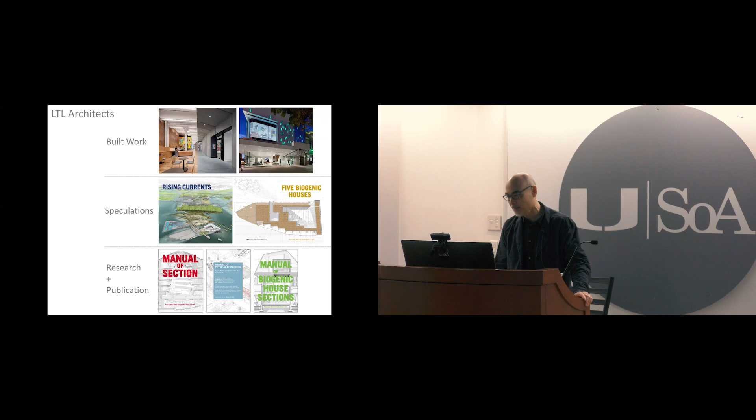The publications have taken, I would say in the last decade or so, the form of what we like to call manuals. We like this term because it references questions of utility or usefulness, and we really think of these publications as tools for the discipline, for students of architecture.

The first of these was the Manual of Section that was mentioned earlier, published in 2016. It's been translated into a number of different languages - we think 5 or 6, we're not sure. We're told there's a Turkish version, but we haven't seen it yet.

So if you see a copy when you're in Turkey, give us a ring and take a picture of it.

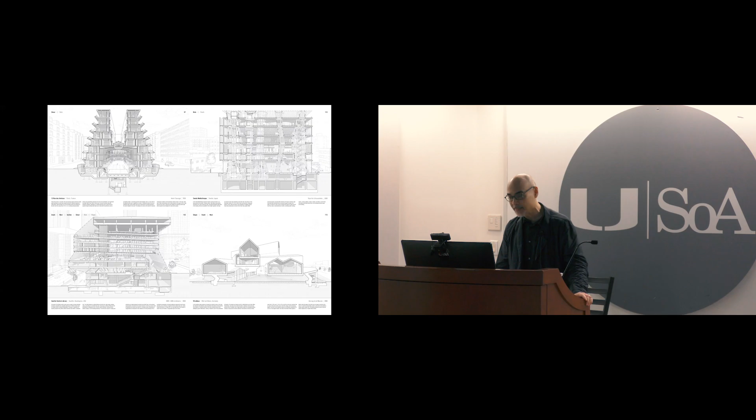The book operates through a series of 64 detailed sectional perspectives that basically investigate section as a site of invention and a space of resistance to the kind of ruthless economic logics of contemporary modes of architectural production. I'm not going to get into all of that tonight,

but I think really since that book was published, we have been, like many people, increasingly concerned about the existential urgency of climate change and its relationship to architecture, with the legacies of extractivism and the material exploitation of landscapes, and the devastating impacts of these practices on humans, on non-humans, and on the planet.

And so in 2022, we came out with this publication after about 4 or 5 years of research. In many ways, I think we think of this as the more important book. And as was alluded to, it aligns with the moment in our own practice where we're opening up these questions of how we build, and more specifically, what we build with in a moment of ecological crisis. So the book is divided into 9 material chapters and a chapter on reuse. This notion of reuse is incredibly important in relationship to addressing notions of embodied carbon.

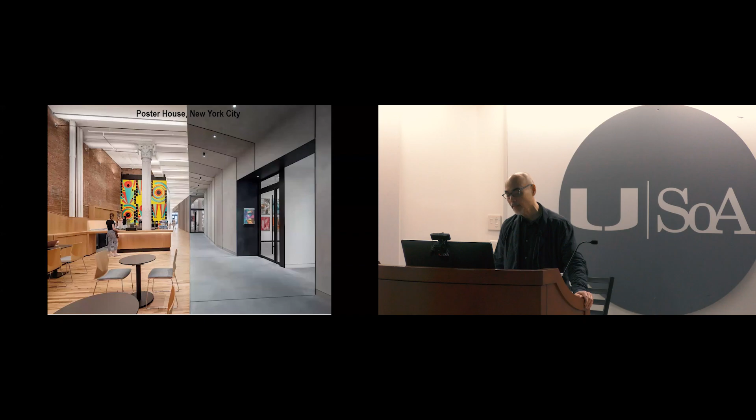And although I won't talk about them tonight, our office has been involved throughout the course of our history with projects that engage reuse at a diversity of scales, from the infrastructural scale of renovating Steeplechase Pier in Coney Island in the wake of Hurricane Sandy, to the renovation of a recently opened museum in New York that reutilizes a 19th century industrial building, to this project for an art museum in Austin, Texas, that repurposes a turn-of-the-century theater turned department store.

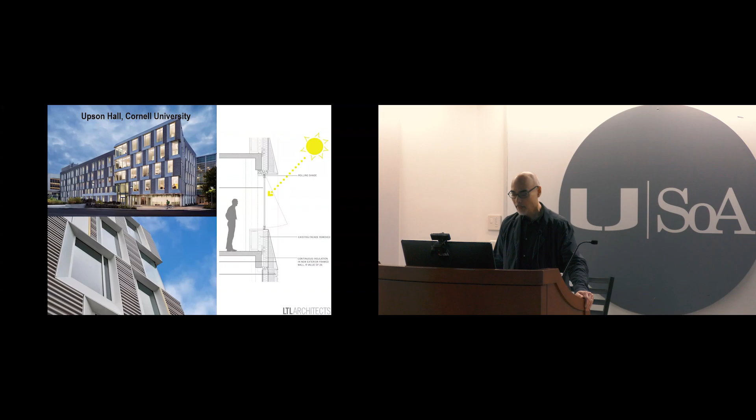Many of these projects, while capitalizing on the logics of reuse, are also dealing with questions of operational carbon, that is with the energetic and thermal performance of buildings. That's really been the primary preoccupation of architects over the course of the last couple of decades. So there's been a lot of focus on how to make our buildings work better, more efficiently, with a higher degree of operational efficiency. But what we've been really thinking about recently is this question of the role of materiality and embodied carbon, and maybe I'll just go through this very quickly.

You've probably seen graphs like this one. This is laying out the trajectory of global greenhouse gas emissions relative to annual outputs of carbon. So the black line is where we are. The big gray swaths are where we're going if we don't actually make any changes. But the frightening reality is that this is actually where we need to be.

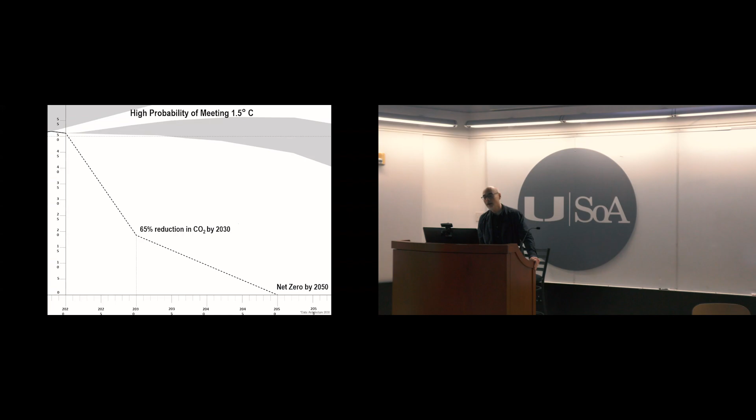Oops, sorry, too far. Which is a 65% reduction in CO2 by 2030 and net zero by 2050, if we're to actually have any chance of staying within the IPCC recommended limits of 1.5 degrees Celsius change in global temperature that would allow us to avoid the most catastrophic impacts of climate change. We're, of course, already failing to do this fairly remarkably, but we think that this is not a reason to give up, but in fact, motivation to address this even more urgently in our work.

So 11% may not seem that big of a deal, but if we actually look at new global construction over the course of the next 30 years, embodied carbon actually becomes about half of that. And if we look at the increasing performance of buildings, the fact that buildings are getting better and better at conserving energy, embodied carbon becomes more than half, about 56% of that equation. The other aspect of embodied carbon is that it's what we could call upfront carbon, meaning that it's already expended at the time that the building comes into existence, whereas operational carbon accrues over the lifespan of the building. So the returns on operational carbon take longer to get to.

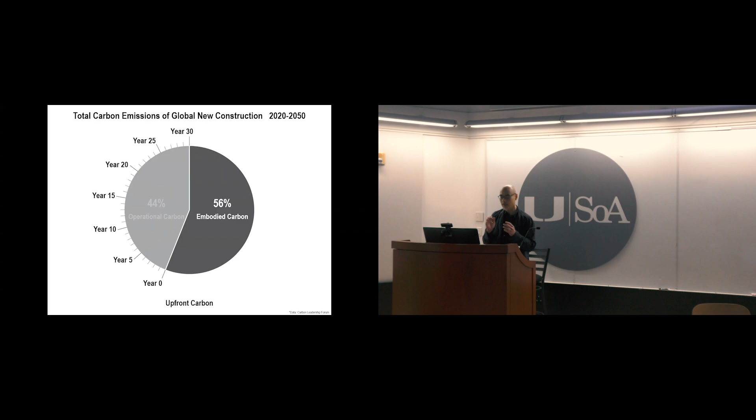And if we're really thinking about these urgent timeframes that we need to act within in order to actually address the urgency of the climate question, we really need to be thinking about, we would argue, embodied carbon. So what can we do?

Again, as we said, we can reuse, we can build less, but in fact, we're not likely to reuse our way out of this situation. So if we look at predictions over the course of the next 30 years, we're going to be adding about 2.5 trillion square feet of new buildings to the planet. So that's roughly doubling the amount of architecture on the surface of the world in the next 3 decades.

Given that enormous increase in production, which probably sounds like good news to architects, it really increases the importance of thinking about how we build at this sort of juncture, and how we think about materials not only in terms of their durability, their maintenance, their structural performance, but in terms of their embodied carbon.

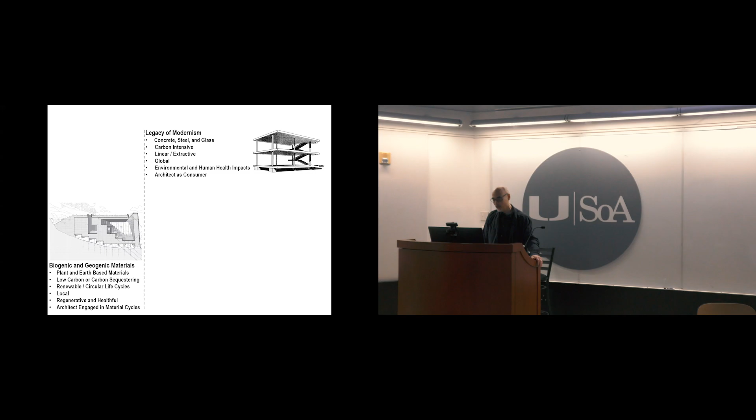But we think one of the really important ones is to build with materials that are either low carbon or, as in the case of plants, actually sequester carbon within their very cell structure. So the good news is that we have these materials. They're already here. We don't need to invent them. Well, we need to research them, but we don't need to create a new thing. They're ubiquitous, they're globally distributed, they're broadly inexpensive, and by and large, we actually already know how to build with them. Well, why is that?

Because, of course, I'm talking about these things as if they're new and revolutionary, but in fact, these are the oldest materials that we've built with throughout human history. And so it's incredibly important to draw upon indigenous knowledge, on vernacular practices, and to think about the cultural traditions associated with building with plant and earth-based materials over time.

However, as contemporary architects, we're also really interested in this question of how do we build with these materials now in the 21st century? How do we think about them in an innovative way? And what are their impacts on, in the context of the book, new forms of domesticity? So the book engages 55 houses from around the world.

And so we might start with this question of why the house? Why are we looking at houses to begin with? And this is a bit of an anxiety-provoking question for us because one could argue that single-family houses are part of the problem. We build too many of them, over 1 million a year in North America alone. Our houses are generally too big. They've gone from about 1,000 square feet in 1950 to over double that in 2020.

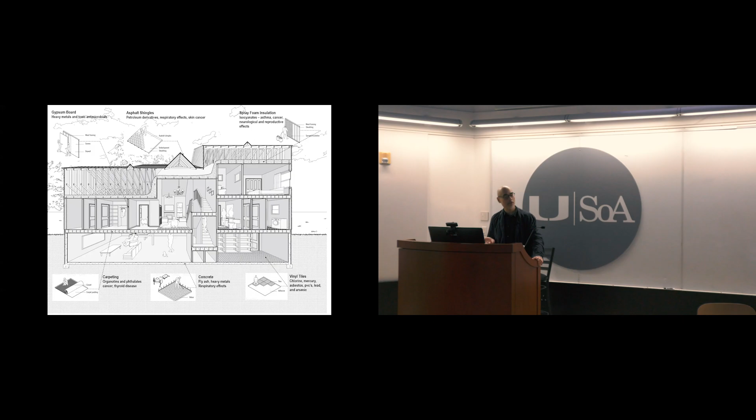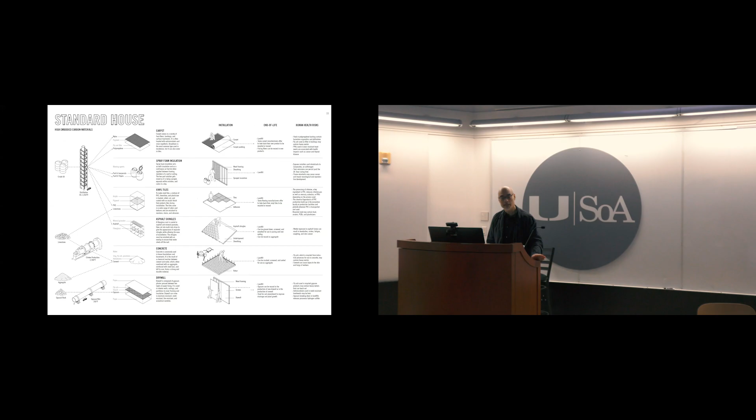And by and large, with the exception of the wood frame that's fairly ubiquitous for American single-family residential construction, they're built primarily out of petrochemically derived products that are toxic, environmentally destructive, and high in embodied carbon. These materials are essentially an extension of the petrochemical industry, a take, make, trash linear cycle, which means that at the end of the day, most of them end up in the landfill and continue to pollute and degrade our ecosystem.

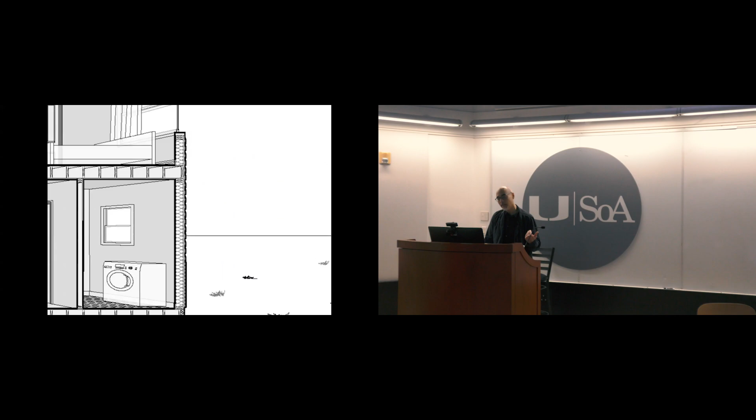If we take a closer look at the construction of the house, we can get a sense of part of the reasons that this is true, which is that if we think about how we build walls today, we tend to build walls out of lightweight, thin, single-performing hermetic layers, which are based on a strict division between inside and outside.

These materials are often working at cross purposes to one another, so inducing issues of mold, of toxicity, of contradictory building performance operations. They're also extremely hard to pull apart and reutilize at the end of life.

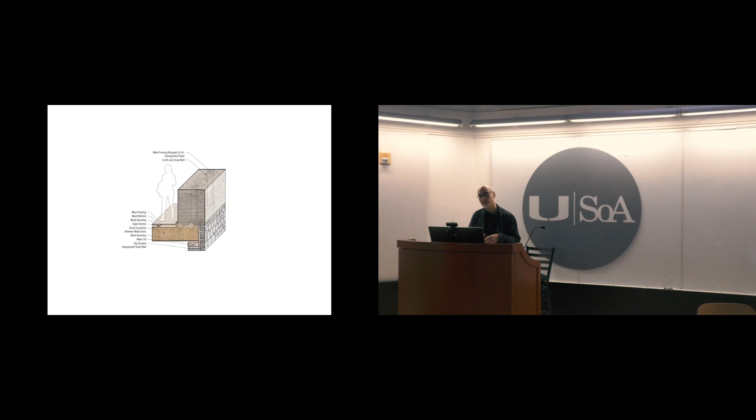By contrast, biogenic and geogenic systems tend towards thickness and towards limited material components, often integrating multiple functions in a single monolithic mass, becoming simultaneously structure and skin, insulation and envelope, a kind of symbiotic assembly in which the whole is greater than the sum of the parts.

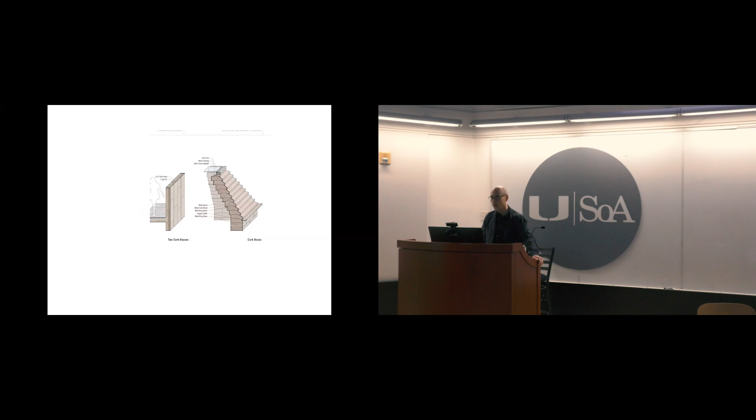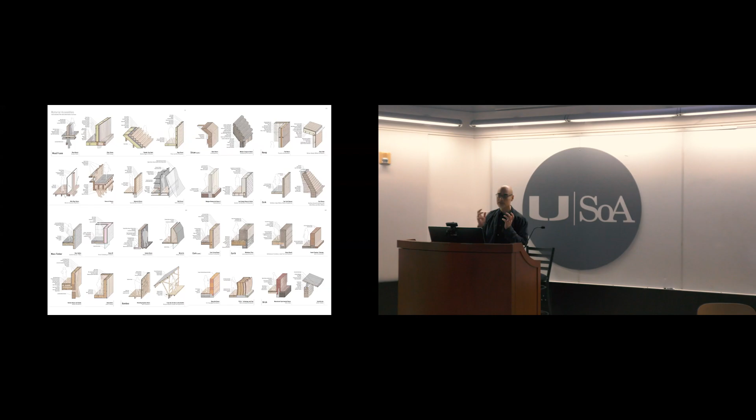So in the book, we look at, again, 55 houses from around the world. These are all, generally speaking, relatively small houses, comparatively inexpensive, drawn from different cultural, climatic, and geographic contexts. And the idea in each of these cases is to think about how in each instance, the engagement with the specifics of the material provokes an architectural response in the house, right? Provokes a kind of spatial and tectonic response in the actual design.

As I mentioned before, the book is divided into 9 material chapters. In each of these chapters, we identify the approximate carbon sequestering capacity of the material. We map each material's life cycle from field to form and back again, repositioning the building not as an isolated artifact, but as a temporary accumulation of matter and energy that has a kind of origin and afterlife, right?

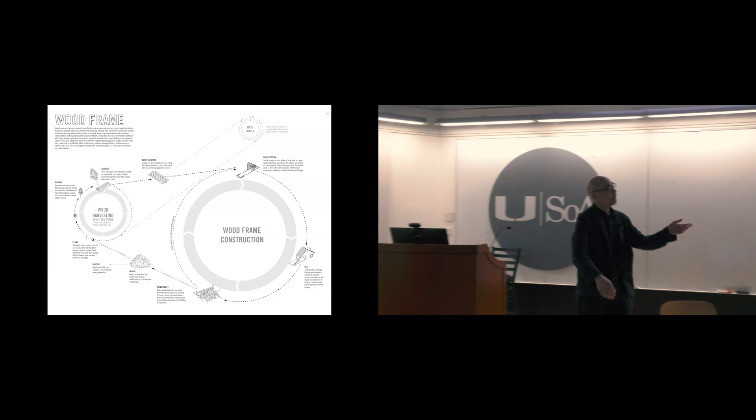So we tend as architects to only think about this 12 o'clock to 4 o'clock part of the cycle. How do we put materials together into the form of a building? But the reality is that those materials come from somewhere. They have to go somewhere after the end of life of the building, and the building really only exists for a limited point in time. So we have to think about this entire logic of how the things that we build with are linked to a whole circuit of material flows that are ultimately bound to natural systems.

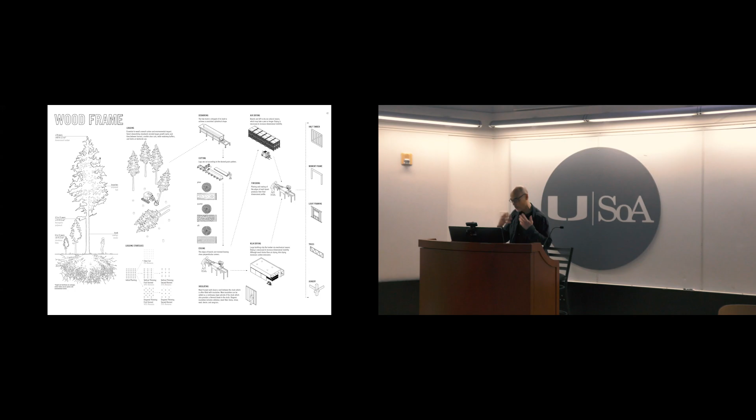We map the transformation of the material from the original plant, in these cases, to the building component. This is really important because it's the transformation of the material that actually constitutes the carbon element of the material, right? It's the industrial processing that produces the carbon of the building component.

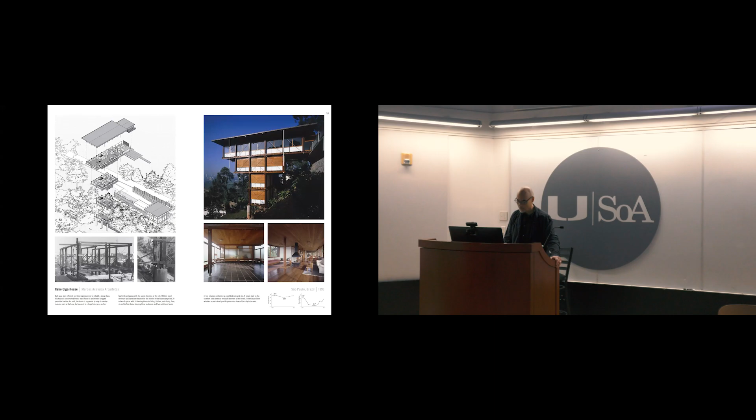Then we look in each of these houses at photographs, axonometric drawings that explode each of the dwellings, then detailed cross-sectional perspectives that allow for an understanding of the ways in which these material systems catalyze architectural response within each of the projects within the book. So I'll go through a few of these material conditions very rapidly.

I'm not going to talk a lot about mass timber because it's probably something you all have heard a fair amount about. It's kind of the poster child for biogenic materials. And obviously it has an amazing capacity to sequester carbon relative to materials like concrete and steel. However, it's complex, right? Once we start thinking about mass timber, we're talking about trees. Trees are obviously very long-lived organisms. The trees that we utilize for construction take about 30 to 100 years to mature.

Cultivating trees, logging releases carbon into the atmosphere, and only about 50% of any given tree is actually converted into usable building material. So there are issues, right? When we're thinking about timbers that have to do with the management of forests, with deforestation, with monocultures that develop in relationship to the production of mass timber. So it's a complex question. But obviously, an incredibly useful product.

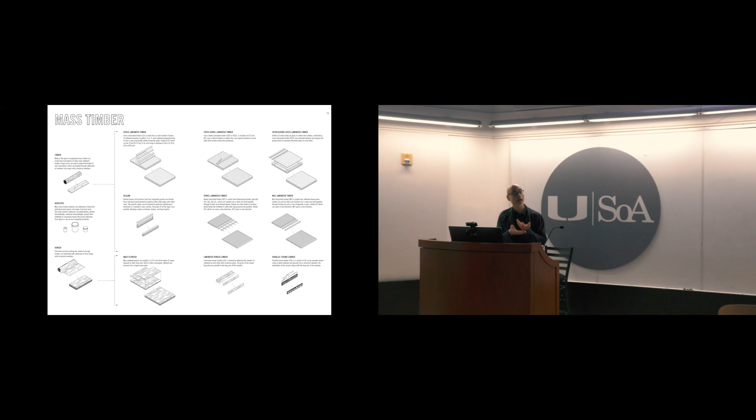I won't get into depth, but it's made from cross-laminating lumber elements in a perpendicular pattern into sequential layers so that they create these large-scale structural planks. The idea of these planks then changes the ways that we can think about building with them. So just a couple of very quick examples.

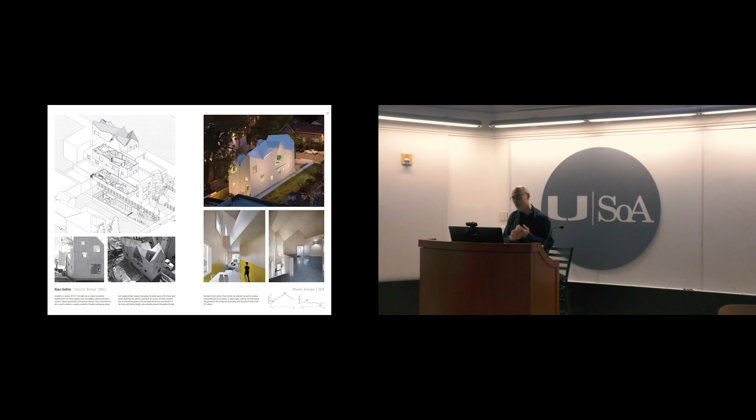Jennifer Bonner's Haus Gables, where these very large-scale CLT elements are used to create the complex internal geometry of the roofs, creating a sort of internal topography and allowing for rapid assembly on site due to the CNC milling and prefabrication of the panels.

A project by Atelier Sotamaa called the Meteorite House, that actually is comprised of 2 layers of CLT construction, a series of CLT rectilinear boxes that constitute the living spaces of the house, arrayed within a more geomorphic outer shell. That thick zone in between is really an air gap that allows for the thermal insulation of the house.

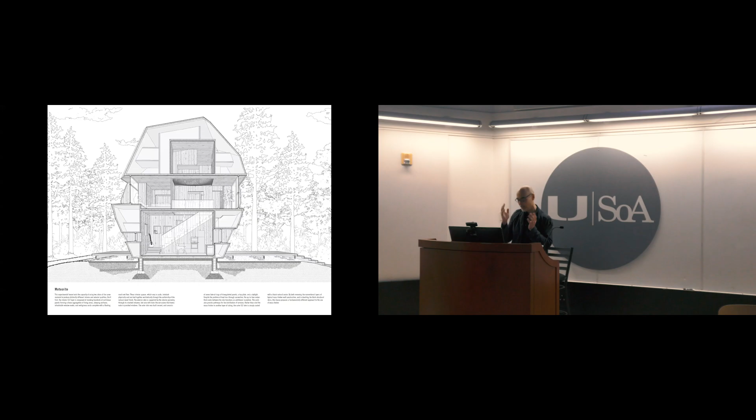So this is a house that's literally all CLT. There's no other insulation except for the air on the exterior, and the outer layers of CLT are coated with an exterior varnish for weatherproofing.

So I'm going to go through these quickly, I said. So we're still in the realm of trees, but cork is a really fascinating material. It's of course the bark of the cork oak tree. And cork has kind of astonishing material qualities. It's water resistant, fungally resistant, rot resistant. It has thermal properties, acoustical properties, and even structural properties.

The limitations when we talk about cork are really that it only grows natively in a very specific region of the world, the Iberian Peninsula and other places around the Mediterranean. And its processing is dependent upon centuries-old skilled labor practices, where the bark is carefully culled from the tree roughly every 7 to 14 years over the lifespan of these trees, which are very long-lived, over 200 years in some cases. These methods have developed over long periods of time so that the underlying organism is not hurt. So it's essentially kind of like shearing sheep.

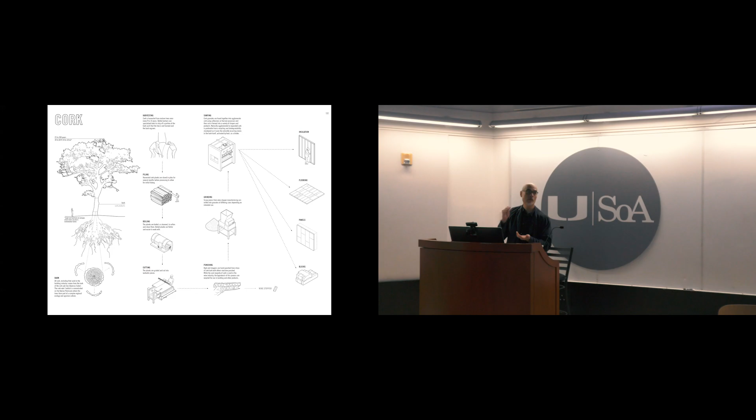The tree continues to live, and the cork goes primarily, believe it or not, almost entirely into the production of wine corks. Billions of wine corks are produced every year, and almost all of the cork that we use in the construction industry and architecture is actually made from the reground residue of the wine cork production itself. So those are granulated, ground up, and then recomposited either using additives or preferably through autoclaving, which activates the naturally occurring resins within the cork to bind to itself.

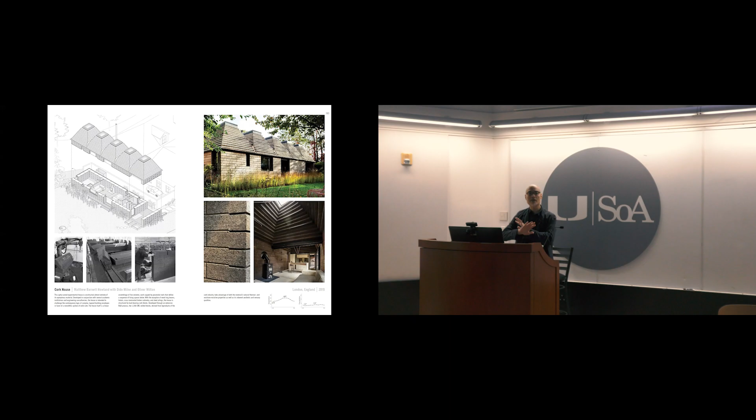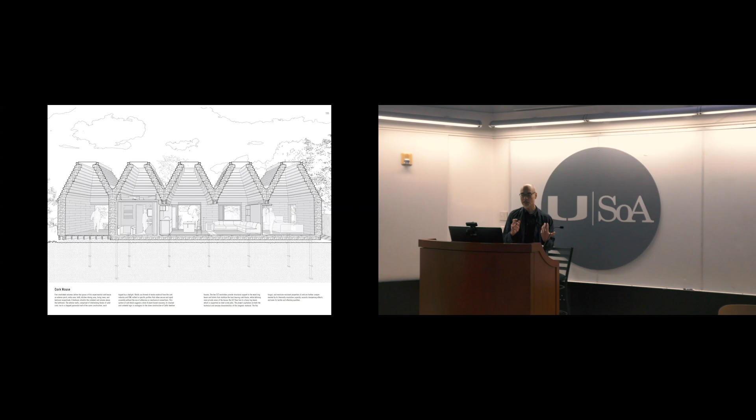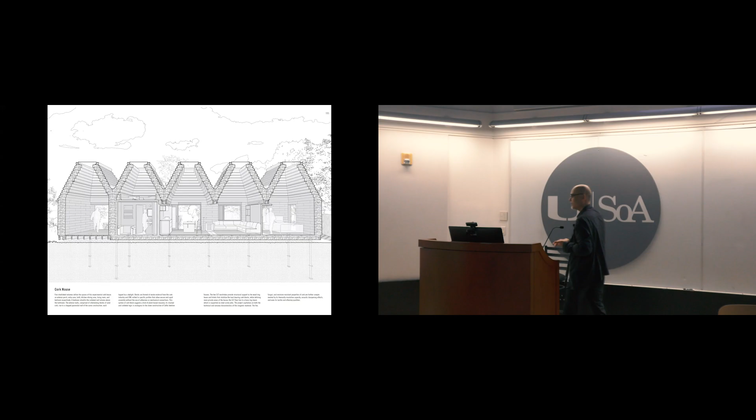Okay, so quickly, a really imaginative house with the unimaginative name of Cork House, in England, that's actually comprised almost entirely of cork. So here the building is built of almost a kind of organic or vegetal masonry: thermally autoclaved cork blocks that are then CNC milled into specific shapes. And as you can see in the section, there's nothing else, right? The wall section is just cork. There's no insulation, finish, layers, structure. It's just cork laid up on itself and then formed into these corbelled beehive-like arches that move into a series of skylights at the top, defining a series of rooms below.

Okay, so now we're moving away from the realm of trees into the realm of grasses. So bamboo is not a tree, it's an arborescent woody grass. It's also among the fastest growing plants in the world. And this is what's critical to think about when we're talking about plants as a building material and their regenerative and carbon sequestering capacity, which is how fast do they grow, right? So with bamboo, we're now talking about not decades to grow a tree, but literally years, 3 to 7 years for most of the species of bamboo that are harvested for construction purposes.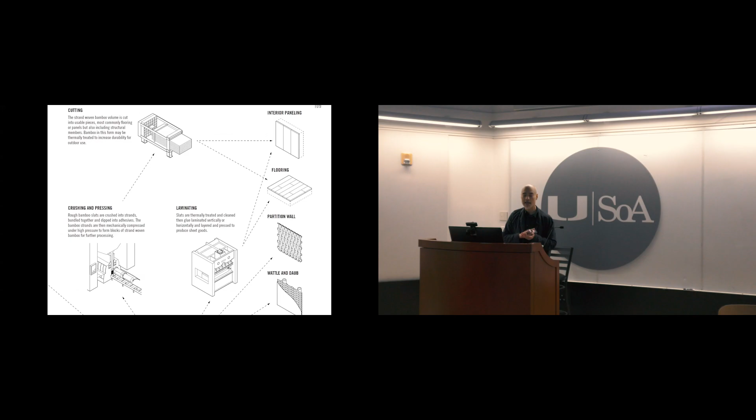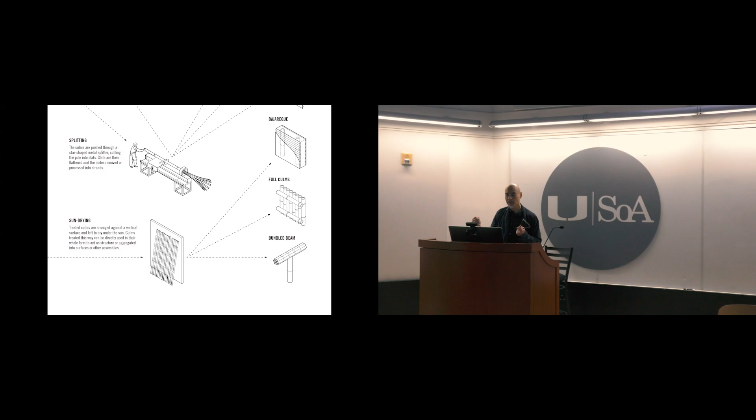Bamboo is also harvested from a rhizomatic root system without, again, killing the underlying organism. So when we harvest bamboo, we're not killing the plant, we're simply culling part of it, which can then be allowed to regrow. Most of the bamboo that we use in construction is crushed, split, and then re-aggregated into sheet goods like flooring and wall panels. But for most of the projects in the book, we were really interested in buildings that actually used the full culm, which is the stalk of the bamboo, which has enormous structural capacity in terms of flexibility and strength, particularly when it's bundled together into different assemblies to create larger beams and columns.

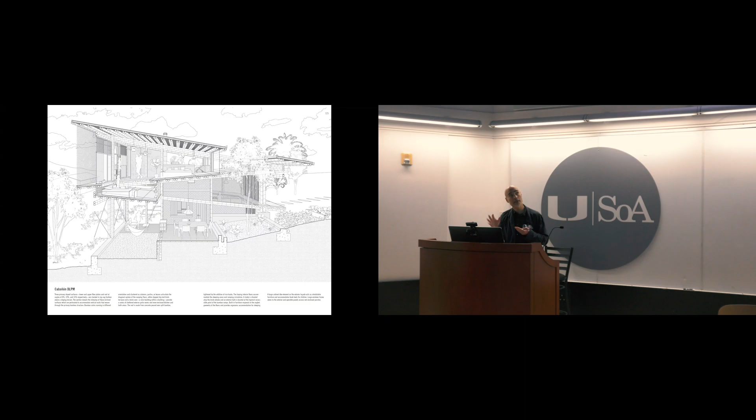So this is a house in Ecuador, again using native local bamboo, that essentially constructs a house almost as a kind of occupiable bamboo scaffolding, which uses a series of inclined planes that produce both the circulation of the house and the living surfaces within. And here, even the limited amount of concrete, which is lightened with rice husk, is poured into half culms of bamboo as a kind of permanent formwork.

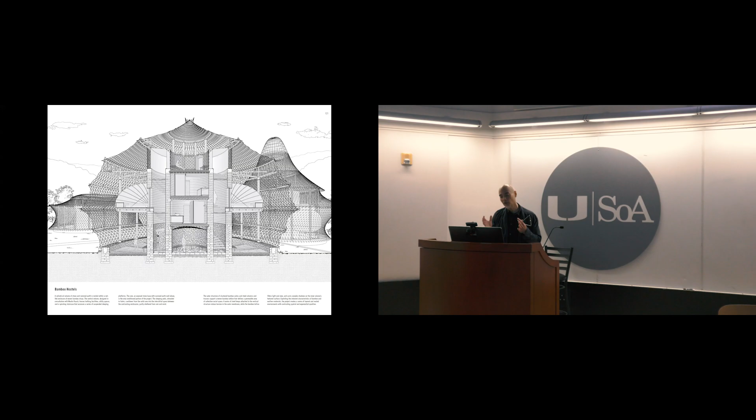A project in Baoxi, China, by Anna Heringer, a German architect, for a youth hostel, where a netting of bamboo, drawn from local techniques and cultural traditions of basket weaving, splitting and bending the bamboo into this woven structure, wraps an earthen core, which is the heating element of the project, and then sleeping pods are cantilevered into the interstitial space in between the two.

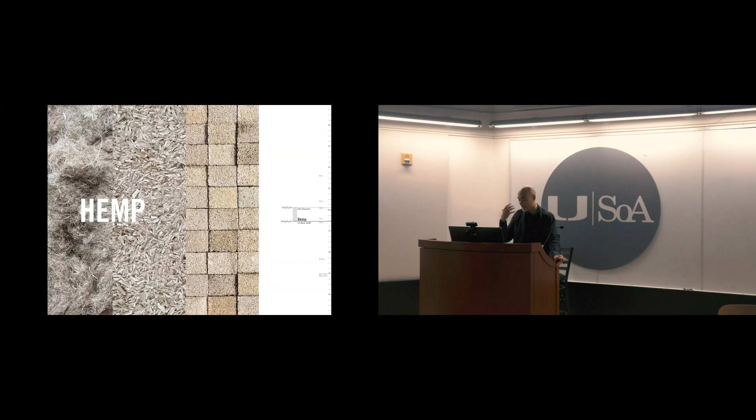Okay, so the last two materials that I'm going to talk about are both essentially agricultural products. And we're also now moving into the realm of insulation. I know that's all what you came to architecture school to study, insulation, right? It's the kind of super sexy part of architecture. But insulation is incredibly important, right? In our buildings, how do we actually allow them to perform better without necessarily inducing a lot more toxic materiality or carbon in the construction of the building?

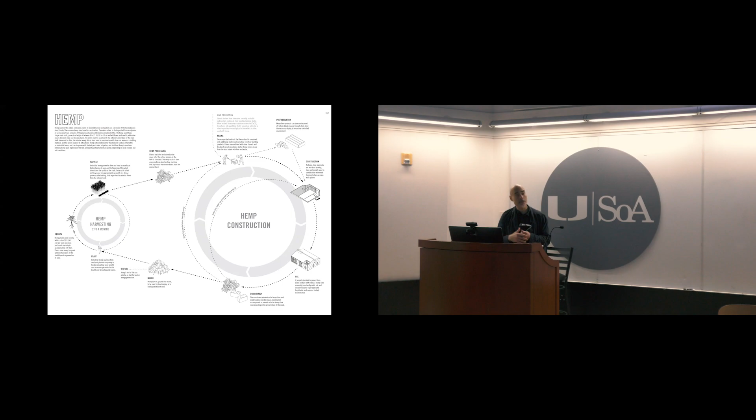So hemp bears a resemblance to another plant that you might be somewhat more familiar with. And in fact, for many years, it was illegal to grow hemp in this country because of its resemblance to cannabis, because of the so-called war on drugs, and it only became legal to grow hemp again recently. But hemp is incredibly productive as a plant. It can be planted in degraded soil. It actually regenerates ecosystems locally. It regenerates soil. It can be grown with very little water, minimal pesticides, no added fertilizers, et cetera. And it can be cultivated in most places twice within a normal growing cycle of another plant. So super productive, super useful.

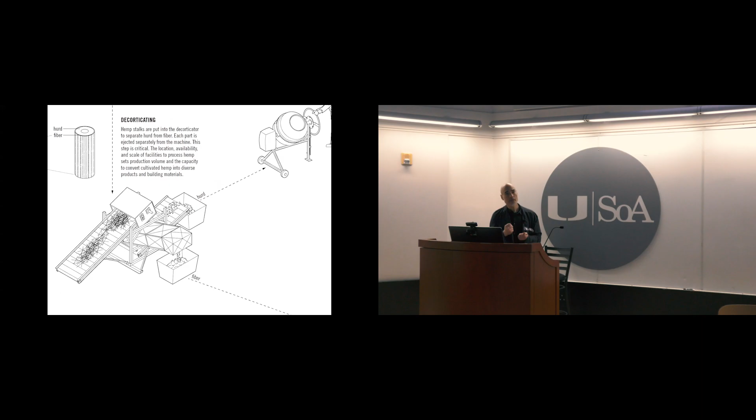Historically, it's been used for everything from fabric to medication. And the part that we use for architecture is what's called the hurd. So basically, the stalk of the hemp plant is broken down, the hurd is extracted, then it's combined with equal parts lime and water to make what's called hemp lime, sometimes inaccurately called hempcrete, which suggests it has a concrete-like structural capacity, which it doesn't. It's rigid and it performs hygroscopically, it absorbs toxins, and it's an extraordinarily good thermal insulator, but it's not truly structural in that sense. It's usually blown into framed walls, compacted into cavities, or it can be formed into blocks and stacked up to form partitions.

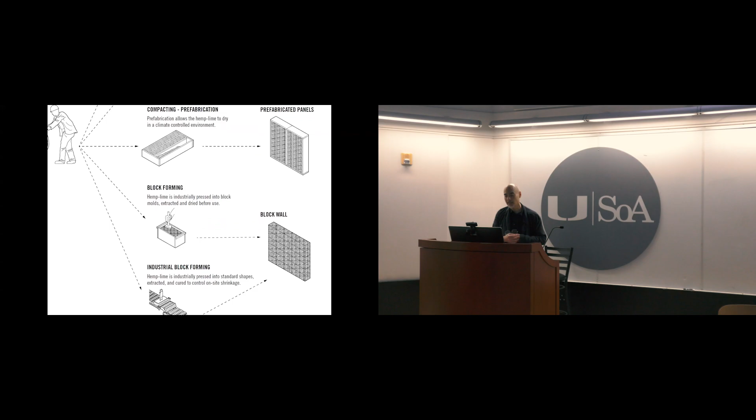Okay, so this is the last material that I'm going to talk about, and I'm going to segue a little bit into some of our own design work. This is the material that we've become really fascinated with at the end of a lot of this research. One of the reasons that we think straw is so important as a potential building material is that it's actually waste material, right? Straw is not to be confused with hay, which is a feedstock for animals. Straw is simply what's left over once you cultivate a grain crop. So rice, wheat, oats, barley, rye, what have you. Once we cultivate it, what's left over is straw.

Most of that straw has very little use. It's used for animal bedding, ground cover, but large portions of it are actually left to biodegrade within the fields of the world. Basically, wherever you grow grain crops for food, which is everywhere, right, you have straw. And according to one calculation, the amount of straw that is left to rot in agricultural fields worldwide is equal in carbon sequestering potential to the total annual global production of concrete, right? So if we could sequester that carbon, we could essentially offset the carbon impact of concrete globally.

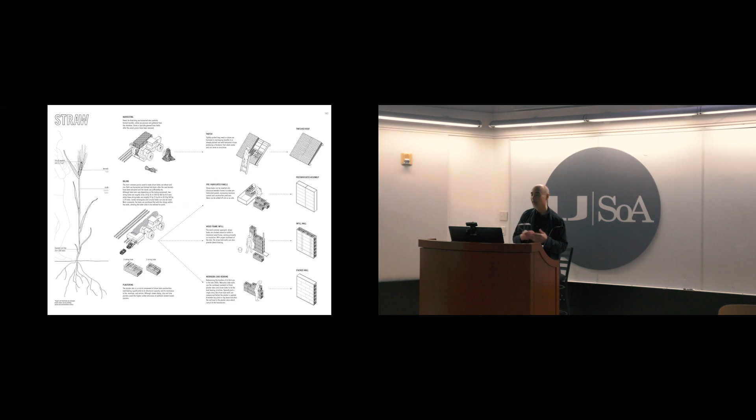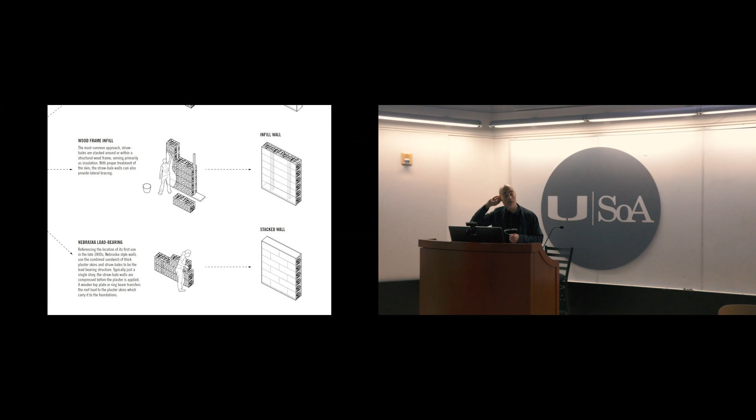Again, the way straw has traditionally been built with is through straw bale construction. This is probably the most widely known. Basically, different scales of straw bale, which is really an agricultural mechanism for storing straw, can be piled up, like large-scale building blocks, into load-bearing walls. This has been happening for hundreds of years. There are over 100-year-old straw bale buildings in places like Nebraska. Typically, that's coated with plaster, frequently earthen plaster on the outside, which aids its structural capacity.

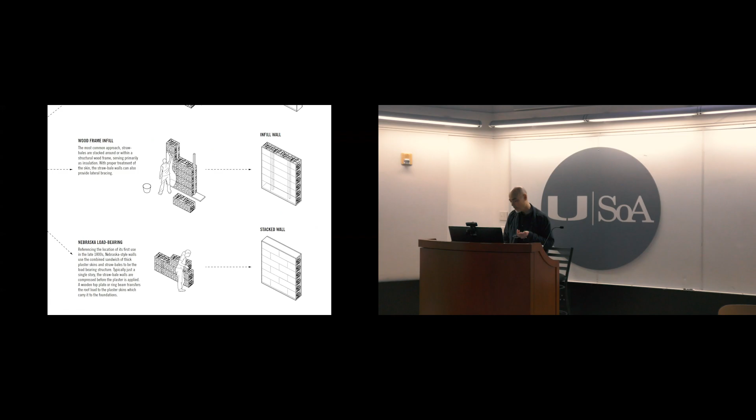There are many more contemporary systems that are either using straw bales within prefabricated cassettes or compacting them into other forms of timber construction, primarily as an insulating material. But what we think is really amazing about straw is that it has both a structural capacity and a thermal capacity. So this idea of structural insulation is something that we think has a lot of beneficial potential.

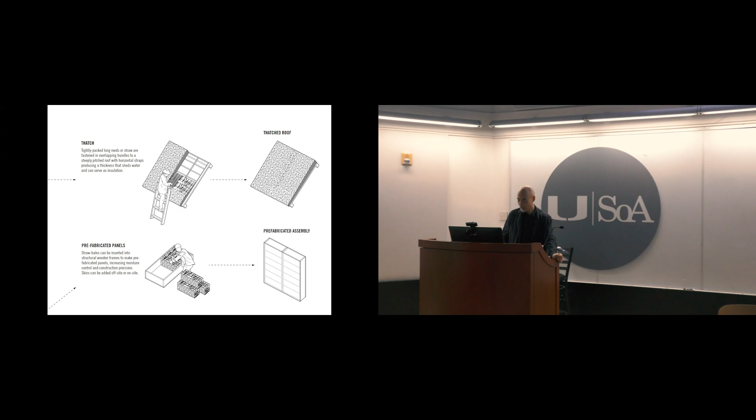I'm not going to talk about it here, but another related material, it's not really the same thing, is thatch, which has a long history, but has also seen increased readaptation in a contemporary format. So these are a series of drawings that we did over the course of last summer, looking at thatch in buildings from the thousands-of-years tradition of Ise Shrine to contemporary buildings like the Henning Larsen Sundby School, which was built just last year in Denmark.

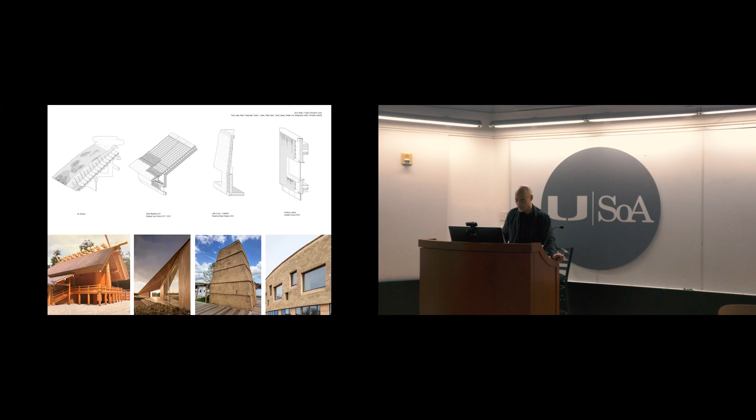So really the idea of thatch is it's typically a waterproofing or roofing material, and it's an exterior product. Unlike straw, it's typically made with reeds, although in some places straw is also used. But moving back to straw, this is a project from the book by an architect named Atelier Schmidt, Werner Schmidt, called the Gartist House.

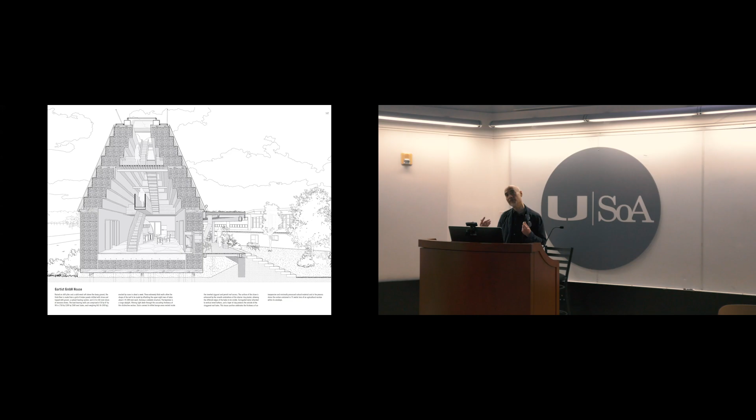And essentially, as you can see, this project uses massive, what are called jumbo straw bales, essentially piling them up to make these massive, thick walls. They're then corbelled into this pyramidal shape at the top of the building, a skylight. This is actually the most carbon sequestering project in the entire book, simply because of the massive amount of straw utilized, about 75 metric tons of agricultural waste.

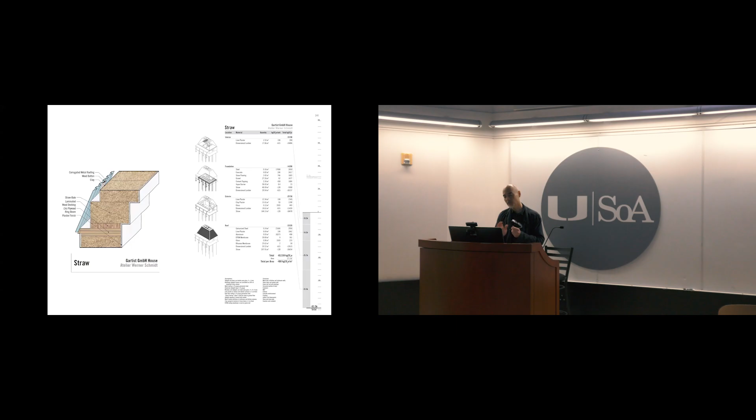And by the way, we did carbon calculations, which is a complex topic that I won't get into here, but this was by far the most carbon sequestering of all of them, simply because of the massive quantities of the material that were utilized.

And so just to segue quickly, and I'll be finishing up here in a few minutes, but to talk about some of our own work, following on the research of the book. So after about 4 or 5 years of working on the book, we obviously became really interested in exploring the implications of these materials within our own design processes. And we became really interested in the varying capacities of the materials, how they could operate together. So we designed a series of 5 biogenic houses.

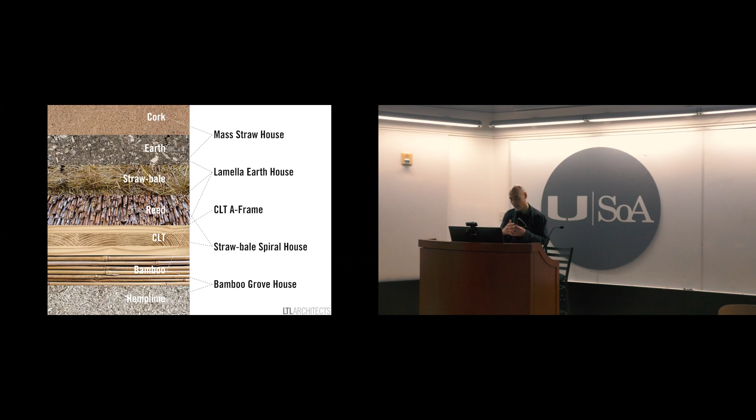I'm going to talk about them only briefly here, but these were generally based on hybridizations between different systems. So looking at how the weaknesses and strengths of different biogenic and geogenic systems can be blended together or hybridized to create positive effects.

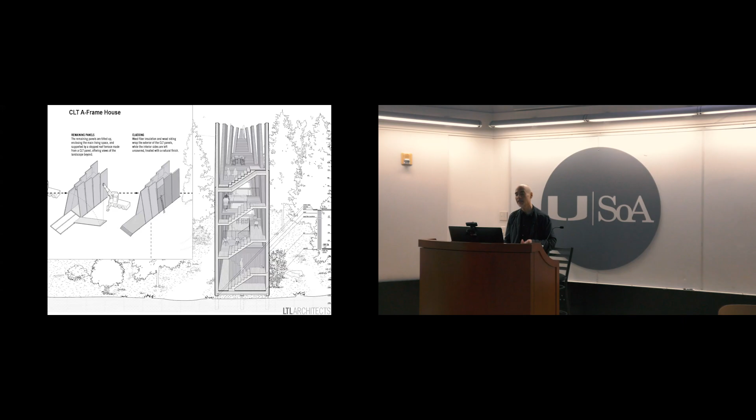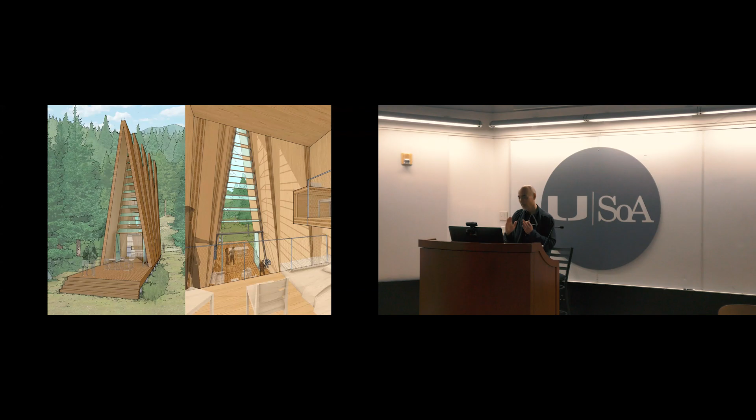So a CLT A-frame house that essentially utilizes the unmilled 10 by 50 foot CLT blank, which is the standard modular size of the CLT panel. Typically, because the milling is associated with additional energy and production time, the idea here was to use it as a very large scale tilt-up panel that could create a sort of integrated contemporary A-frame cabin, a series of sleeping platforms projected out into the echeloning space of this triangular form.

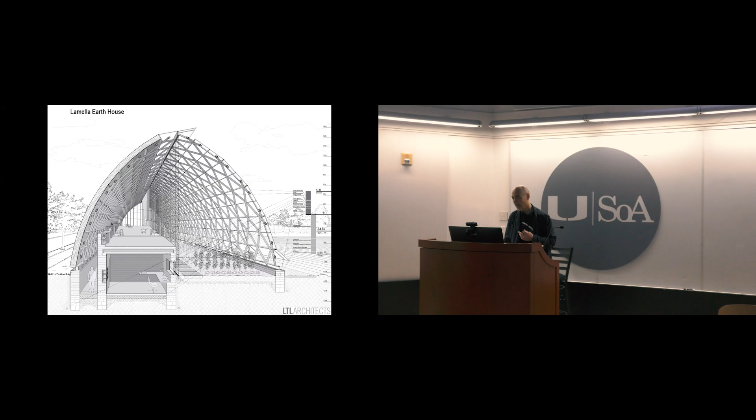Lamella Earth House that essentially shelters an earth-based dwelling within a large greenhouse constructed out of modular bamboo elements that are comprised into a large-scale arch that creates a passively conditioned interstitial space that acts as both an environmental buffer for the house, an interstitial thermal layer that mediates the climate, but also acts as a productive garden for the inhabitants.

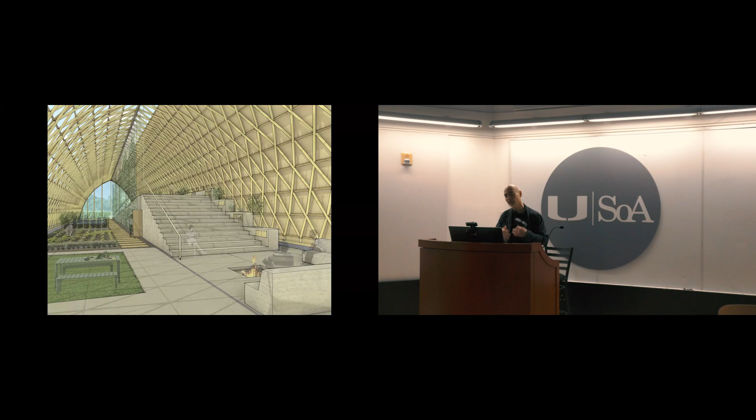And then finally, we designed 2 houses that were really based on this idea of straw as thickness. And what really fascinated us here was the idea that if we're thinking about a material that's plentiful, cheap, that's everywhere, and that the more we use of it, the more carbon we sequester and the more thermal and structural benefit that we get, then the whole modernist paradigm of optimization basically gets inverted, right? So for over 100 years, we've been trying to use less and less material to do more and more things, right?

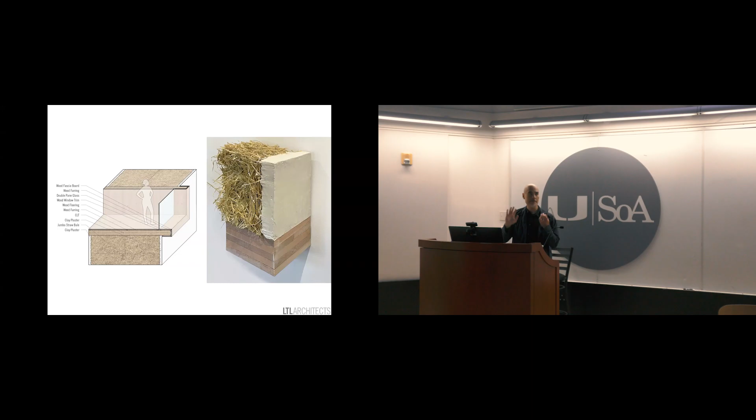To perform highly, we now have extremely thin buildings that we have to then thermally condition and augment in different ways. So the idea here was, could we think about thickness, right? Which is something that's in a way been exorcised from modernism, from modernist ways of thinking about space, as a positive generator for the architectural form. The two houses are both based on stacking up jumbo straw bales. So again, these very large scale agricultural modules.

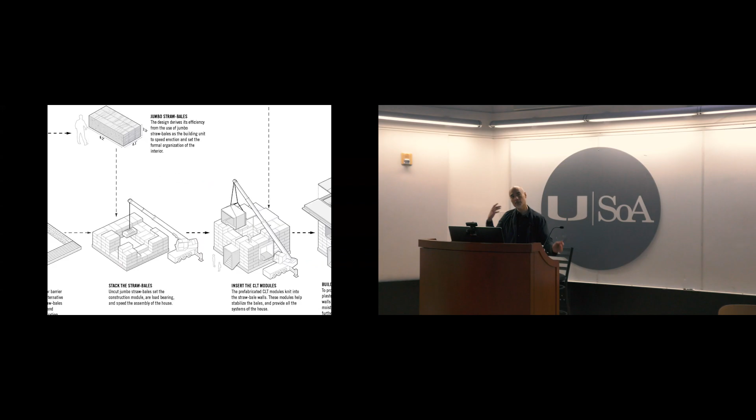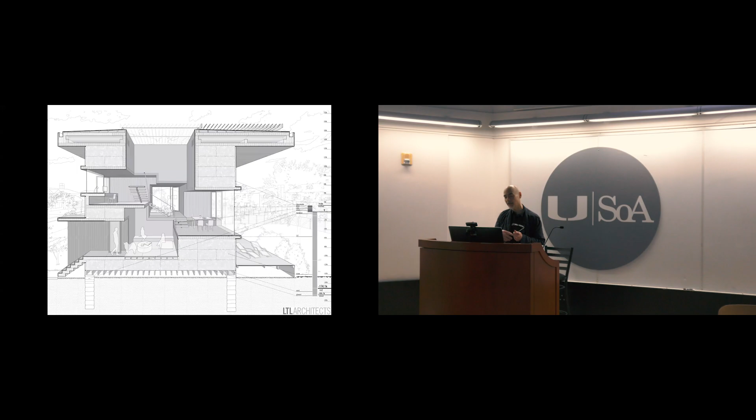The first is a very simple hollow cube of stacked straw bales in a series of CLT prefabricated modules. The straw bales support the CLT modules, and the modules stabilize the straw bale assembly. They're arranged in a continuous spiraling circulatory pattern linked by a staircase that moves from front door to roof deck, and each of the prefabricated CLT modules comprises one of the programmatic spaces of the house. Each one also becomes an occupiable window that perforates the thick surface or mass of the walls of the house to create a space that's ultimately both thick and massive and permeable at the same time.

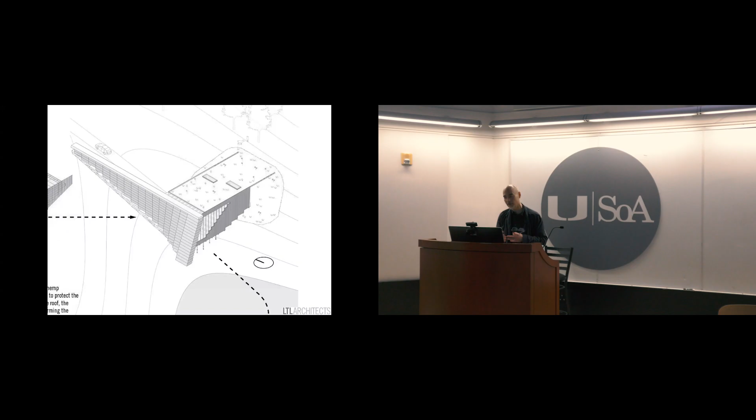The second of these houses is based on two differential methods of stacking up jumbo straw bales. So a corbelled wall and then a terraced landscape. Those two elements are tied together by a series of structural timber box beams that span between them and are filled with additional straw. Those are capped by a sacrificial layer of straw that allows for the house to essentially biodegrade into the surrounding landscape. The primary spaces of the house are captured between those two elements, creating this stepped, terraced interior logic, a sort of domestic interior landscape.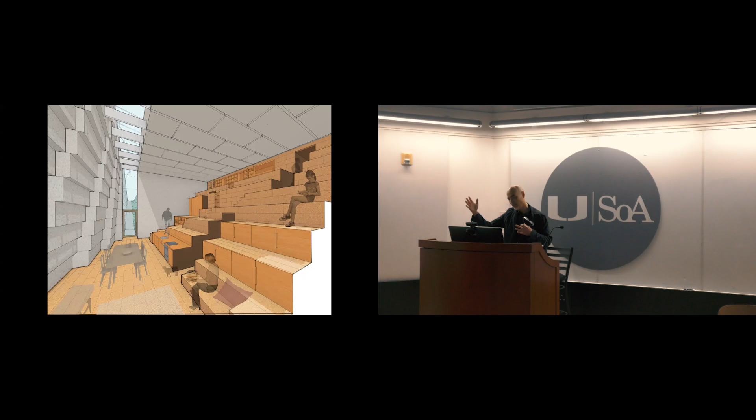Whereas the private space of the house, the bedrooms and bathrooms, are burrowed back into this kind of massive thickness of carbon sequestering straw that insulates the living spaces of the house from the surrounding environment, and creates these exchanges between skylights, interior spaces, the ecosystem of the site, and the occupiable spaces of the house itself.

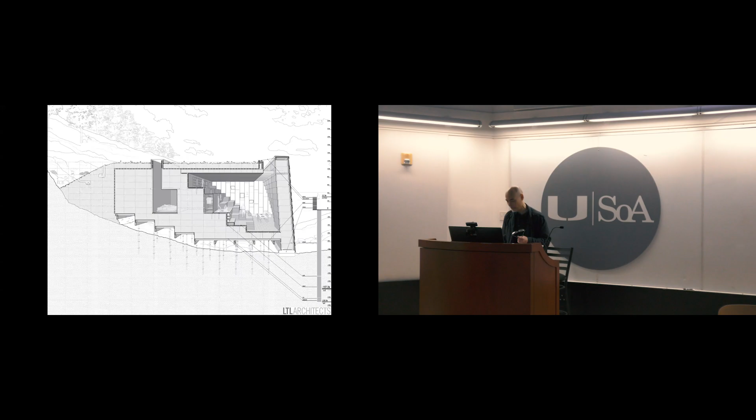So in this case, right, this idea that thickness, which is frequently conceived in negative terms, here really is optimized for thermal and structural benefits. So in this case, in a sense, the excessive becomes efficient. Okay, so I'm going to wrap up here with just a couple of quick final projects.

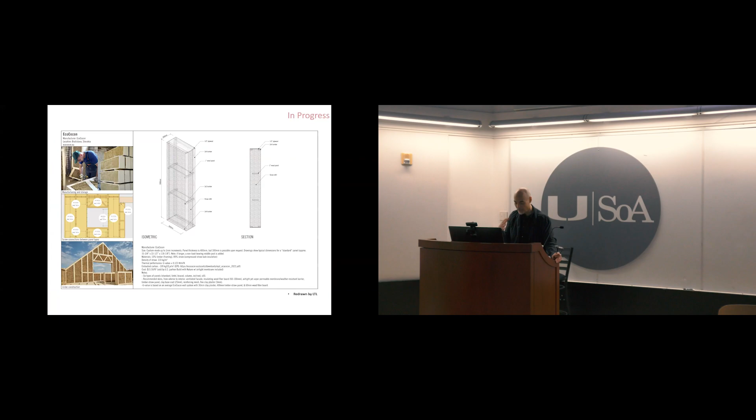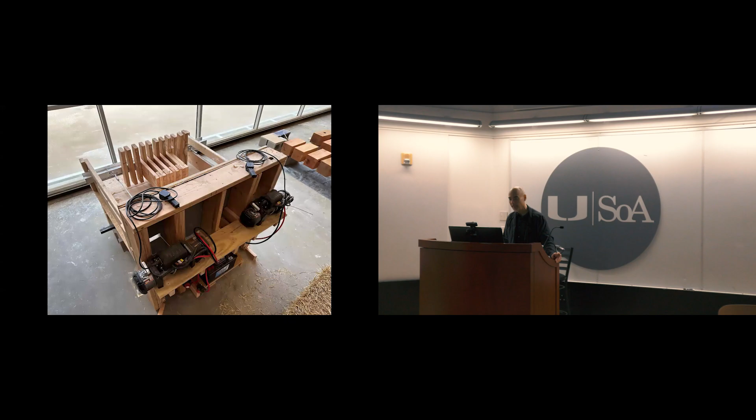We've also been doing, in addition to design work, a series of material experiments. As I mentioned, there are a number of companies and fabricators that are now working with prefabricated compressed straw panels that can be used to build small-scale constructions fairly rapidly. We were really interested in looking at how does this work? How do we do it? Can we do it ourselves?

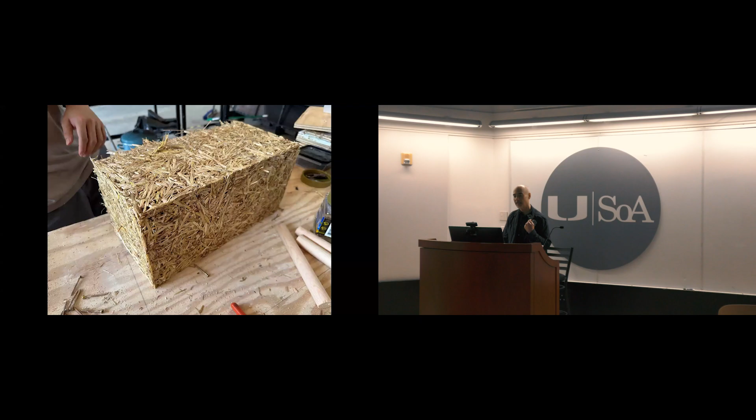So we built this kind of crazy machine that compresses straw. We operated and experimented with different binders. This is actually mycelium. So once we compress the straw, which is what gives it its thermal and structural capacity, you then have to hold it together. So we worked with different materials, mycelium in this case, lime, cement, wood glue, everything we could find, lime, earth, different composites.

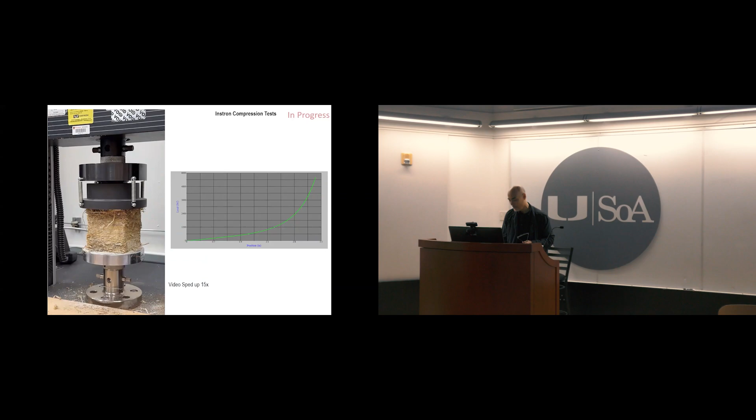We also put these elements in what's called an Instron machine, which is basically what we use to test the structural capacity of materials. And what you see is, it's just really weird, right? This behaves very differently than any normative material. So if you put a chunk of concrete in here, it will basically resist, and then at some point it'll catastrophically fail, right? What the straw does, it keeps squishing down, and then it bounces back. So you have a squishy material that operates in a very different way than ordinary structural materials do.

Two final projects very quickly. So this is one that's very much in process. We're working with a new product that's being developed for compressed straw boards, which actually use a thermal process to compress and bind the straw to itself using, again, naturally occurring binders within the material. Instead of using this as a planar wall surface, we're looking at stacking it up to create a thickened thermal envelope, but also testing its structural capacity in the form of a modular prefabricated dwelling that we're planning on constructing this summer.

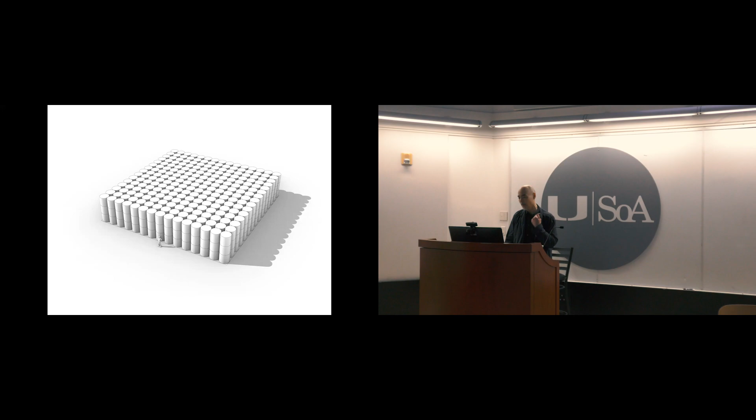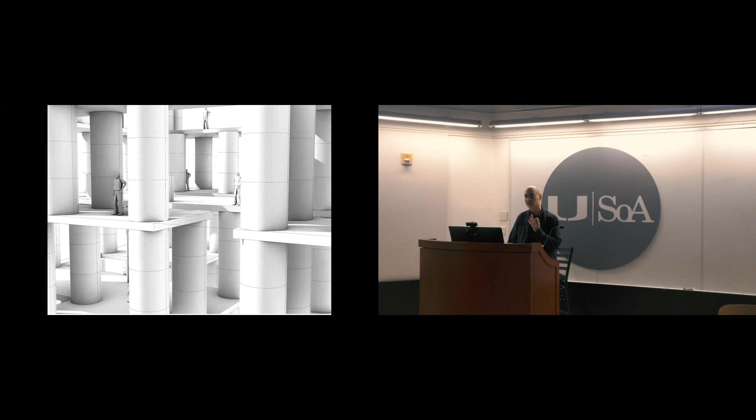We also became really fascinated with, some of you may have seen these, the ubiquitous feature of the American agricultural landscape, right? These jumbo circular straw bales, which we see everywhere, and the idea that these could actually become a form of occupiable structure or a kind of spatial thickness, working with it as a kind of organic poche that could be modulated in different ways, a new form of hypostyle hall, perhaps, that could be combined with stacked layers of CLT to create a multi-story structure.

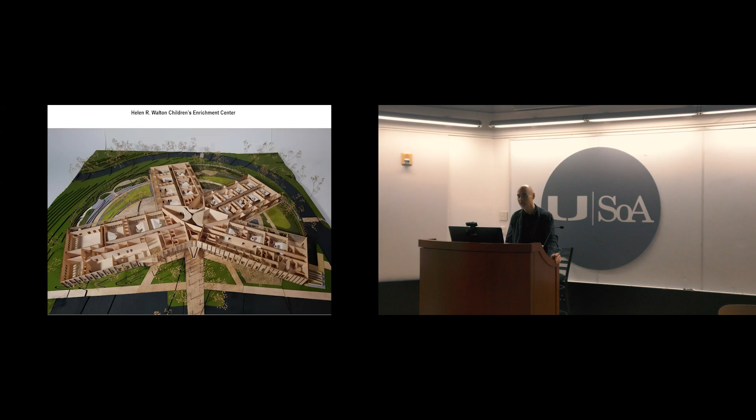And then, and this is the last project, I promise, we were also thinking about this project, which we completed a few years ago for an early childhood enrichment center in rural Arkansas. The building was predicated on a couple of principles. One was that the children would have immediate and constant access to the out of doors from all of their learning spaces, but also that everything in the building would be low VOC, low toxicity. So there were no plastics, no vinyls, there was no PVC in the building. All the materials were low formaldehyde. However, generally speaking, we used concrete, we used steel.

So we're interested in working with this client to develop a rapidly deployable prototype for thinking about how we could construct these kinds of early childhood education centers within rural areas of the country where you had both a surplus of straw, but also a lack of access to childhood education.

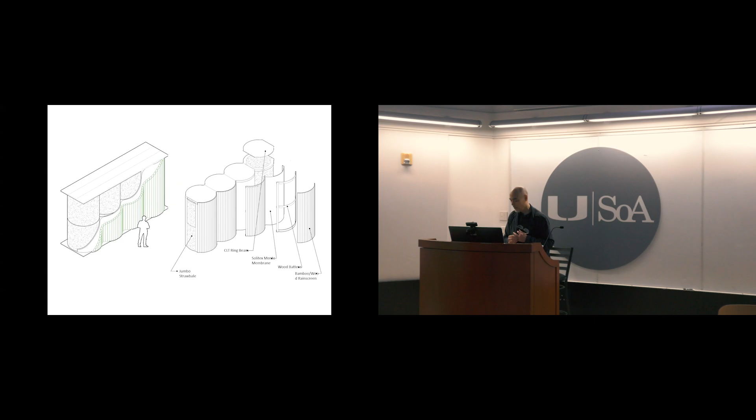So we developed this system of combining jumbo circular straw bales into these linked, chained arrangements, coating them with a flexible skin of bamboo, and then combining them into a series of circular classrooms that could be capped by a sequence of LVL beams in a reciprocal roof shape orchestrated around a central oculus, creating these thickened insulated classrooms that were illuminated from above.

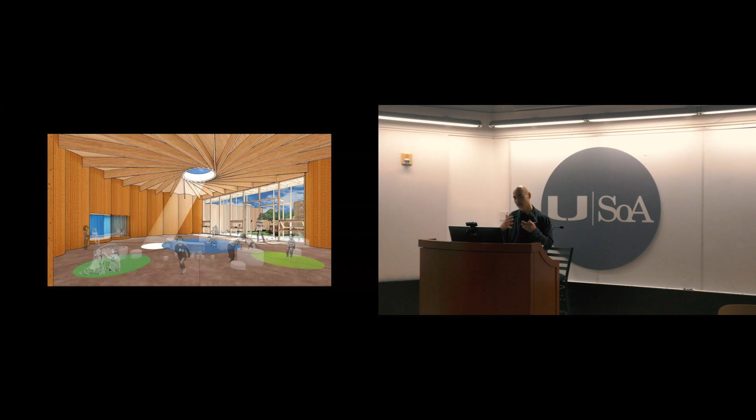The thickness of the columns allows for additional storage space and childhood cubby holes, but also extends out into a series of adjacent playscapes. Each two of these circular classrooms would be combined around a modular CLT core, creating heart-shaped spaces linked to a series of age-appropriate exterior playscapes.

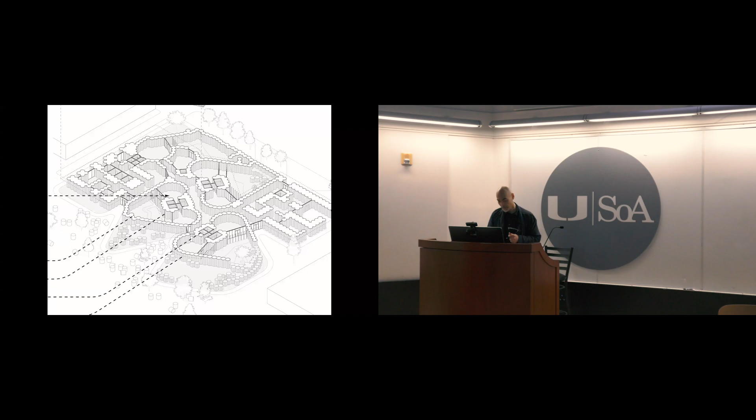As the jumbo straw bales move from inside to outside, they lose their protective skin and are allowed to biodegrade into the surrounding terrain, creating a substrate for productive gardens that act as both a nutritional and educational resource for the students.

So just to summarize, in all of these instances, experiments, and research, we're interested in the ways an encounter with these biogenic material systems can act as a catalyst for rethinking a whole series of architectural commonplaces, from questions of standardization and efficiency, maintenance and repair, to notions of durability and entropy. We feel like we're at a potentially super exciting moment.

If one could argue that modernism was ultimately predicated on the emergence of new structural capacities based on the emergent materials of concrete and steel, we feel like we're at a fantastic moment to test, experiment with, and speculate upon how these plant-based logics of building can inform new ways of building—ways that are not only better for the planet and for ourselves, but can also create a more convivial relationship to the planet and to each other.

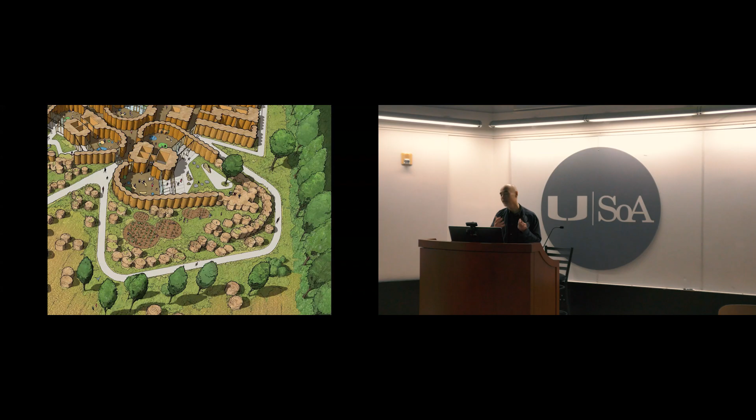Thank you. That's it.